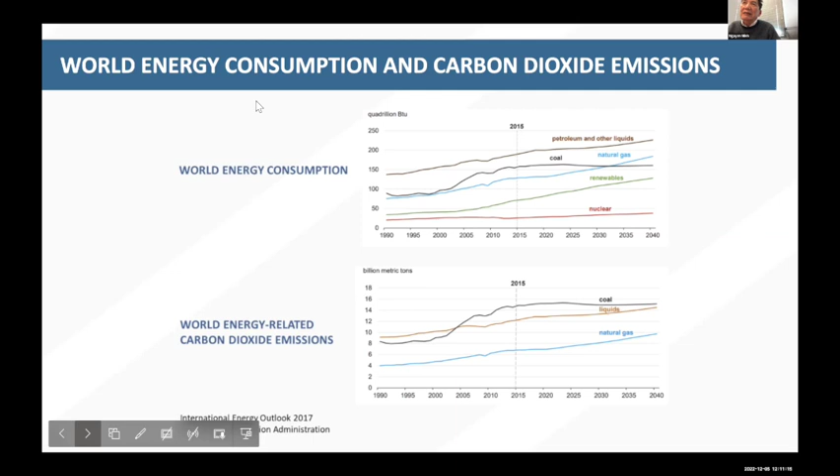According to the U.S. Department of Energy Information Administration, or EIA, world energy consumption is estimated to increase about 28% from 2015 to 2040, with fossil fuels being the largest energy sources, about 3/4 of the energy use worldwide. As the use of fossil fuel increases, EIA predicts world energy-related CO2 emission to increase an average of about 0.6% per year.

So meeting this energy growth while limiting CO2 emission requires better efficiency and improvements in the use of energy sources. In addition to efficiency improvement of current energy technology and use of certain methods such as carbon capture and sequestration, potential approaches include development of clean and more efficient energy systems such as fuel cells, expansion of sustainable energy technologies such as solar and wind, and use of clean fuels such as, for example, hydrogen, especially clean hydrogen produced from water splitting using sustainable energy. So fuel cell and hydrogen technology can play a significant role in the efficiency improvements and emission reduction strategy for the future.

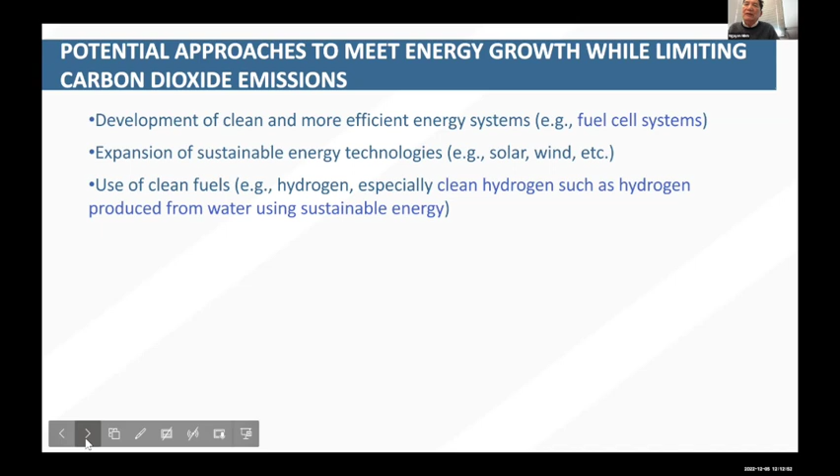Hydrogen and fuel cells are closely associated. Hydrogen is the primary fuel for fuel cells. Fuel cells with hydrogen can be used for clean and efficient generation of electricity. Fuel cells in reverse operating mode, or electrolysis mode, can be used to split water to produce hydrogen. Another feature of fuel cell technology is that certain types can also operate on fossil and renewable fuels.

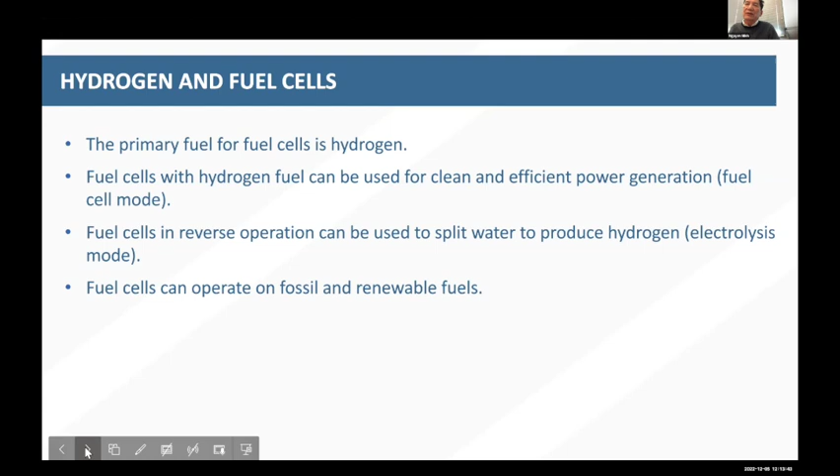Hydrogen and fuel cell technology R&D at UCSD focuses mainly on solid oxide fuel cell and all solid state technology, operating at high temperatures in the range of 600 to 800 degrees C. Our research aims at developing the technology for power generation, referred to as solid oxide fuel cell or SOFC; hydrogen production, referred to as solid oxide electrolysis cells or SOEC; and reversible operation for both hydrogen and electricity production, referred to as reversible solid oxide cell, or RSOC.

The objective of our research is to engineer materials, develop innovative designs and low-cost manufacturing processes, and optimize operation to develop a low-cost, high-performance, and lightweight solid oxide technology for a broad range of applications, including future applications with stringent requirements, such as power systems for electric aircraft.

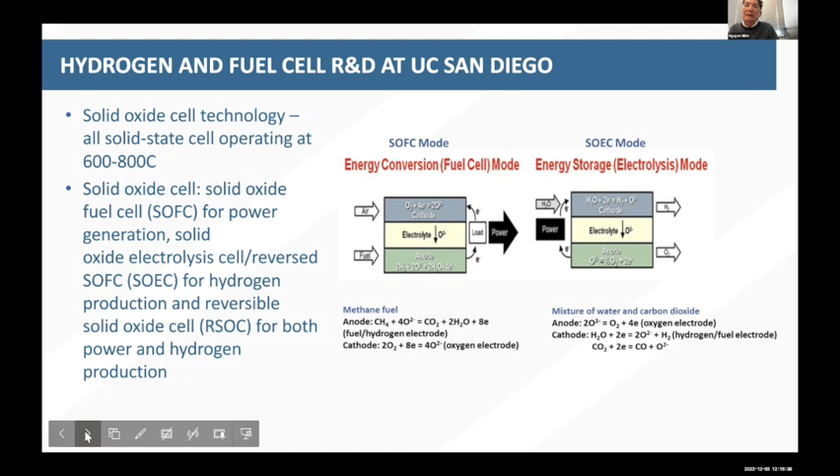So I did mention that the solid oxide technologies can operate at high temperature and can be used for various applications.

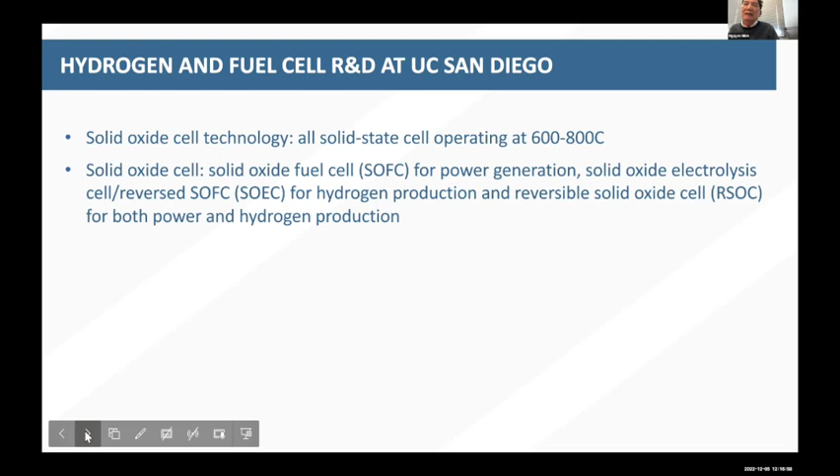Solid oxide technology, in my opinion, could serve as the base technology for future energy systems. I believe that future energy systems should have the characteristic of flexibility, that is fuel flexible, operable on a variety of fuels, and compatibility, that is environmentally compatible.

Other desirable characteristics of future energy systems include capability, that is multifunctional; adaptability, that is suitable for diverse applications and versatile to local energy needs; and lastly, but also importantly, affordability, that is cost competitive and cost effective.

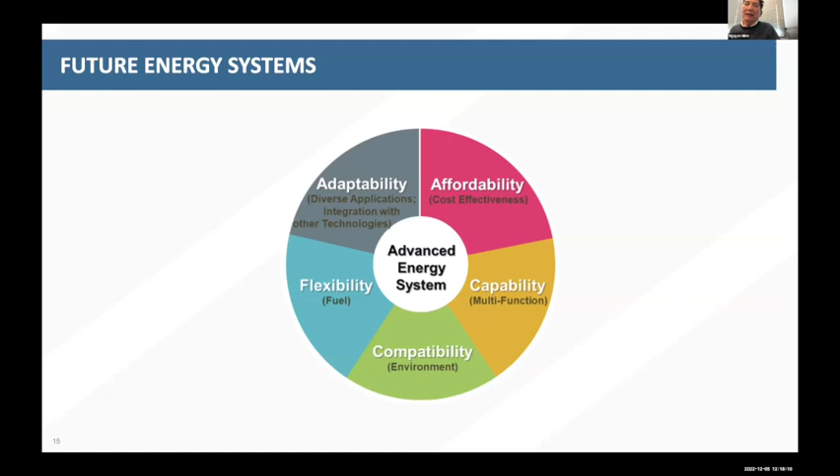The solid oxide cell technology has all those characteristics, so I believe it can serve as a base technology for future energy systems. Its fuel flexibility, capability, and adaptability set the solid oxide cell technology apart from many other energy technologies, and also other types of fuel cells.

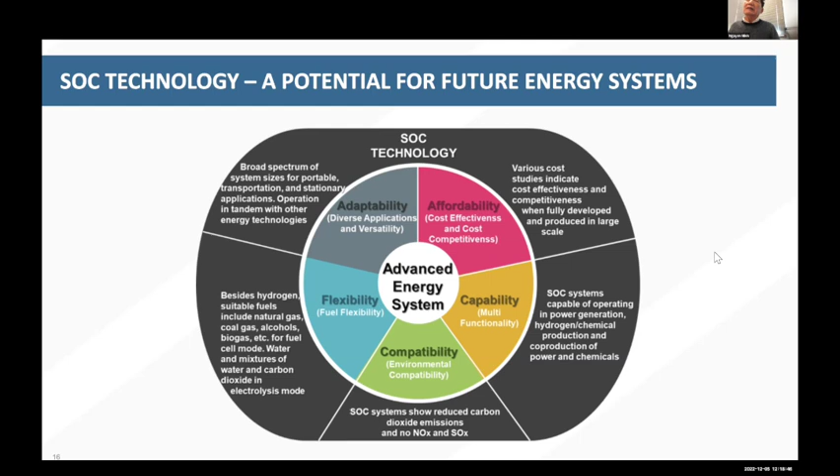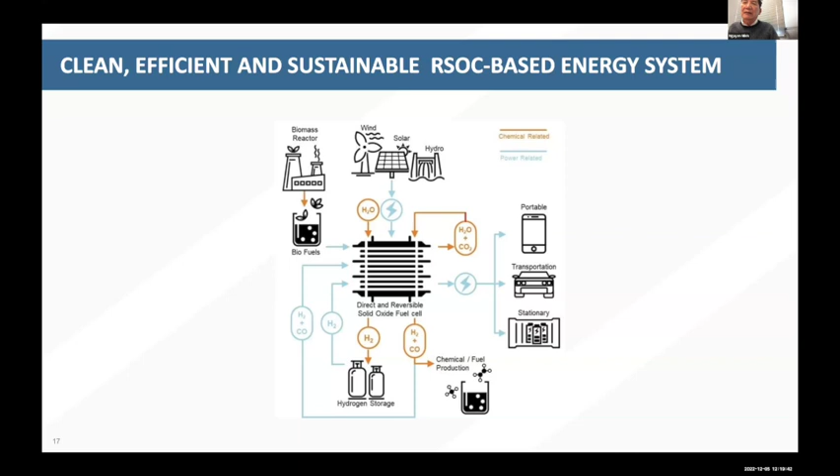In a project at UCSD supported by the Department of Energy, we've been developing reversible solid oxide cell technology for a distributed energy system that can produce about 750 kilograms of hydrogen per day, and also about 600 kilowatts of electricity. This system can be used for on-site hydrogen generation for hydrogen filling stations, and can also provide power for small communities.

Before I start, I can't refrain from showing you this.

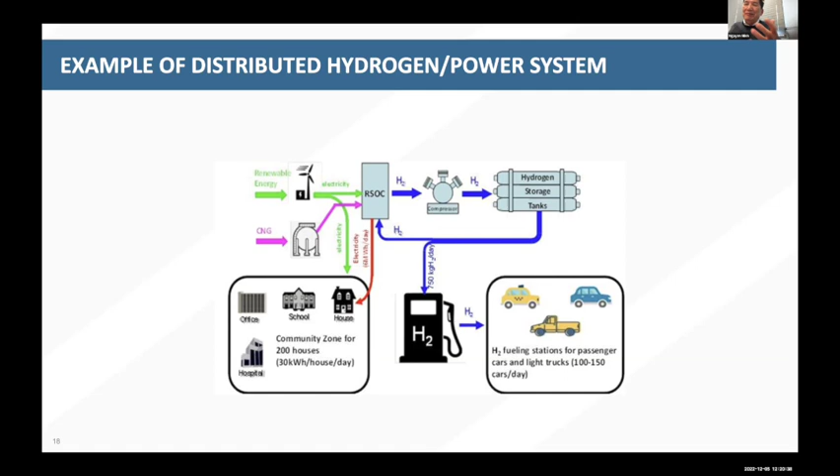The solid oxide cell technology that has been developed for hydrogen production has found an application in space exploration. NASA has selected solid oxide electrolysis cell technology for its Mars mission to generate oxygen on Mars using the Mars CO2 — Mars atmosphere contains about 96% CO2. The technology was successfully demonstrated for oxygen generation in the Mars mission on the Mars rover in April 2021.

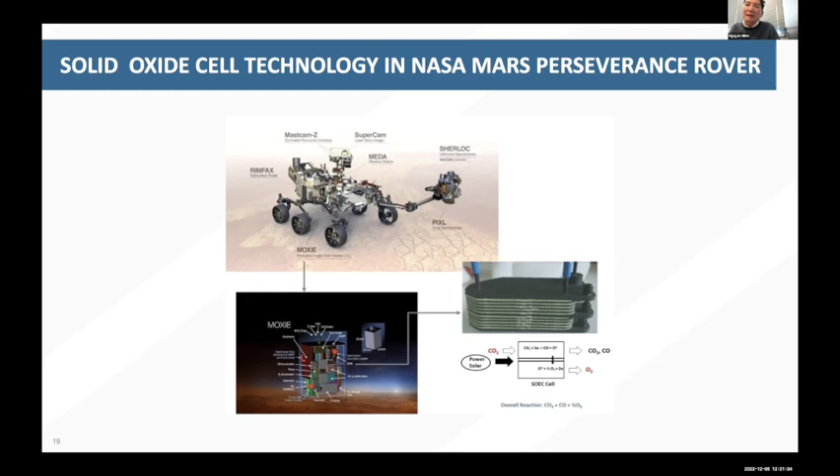In summary, clean, efficient, and versatile hydrogen and fuel cell technology, I believe, can play a significant role in energy systems for the future. You may wonder, these technologies are so good, why not widespread use? Well, the technology still needs significant improvement in a number of technology areas, and also in the area of cost, before it can be used for widespread application and adoption. That concludes my part of the discussion. Thank you very much for your attention.

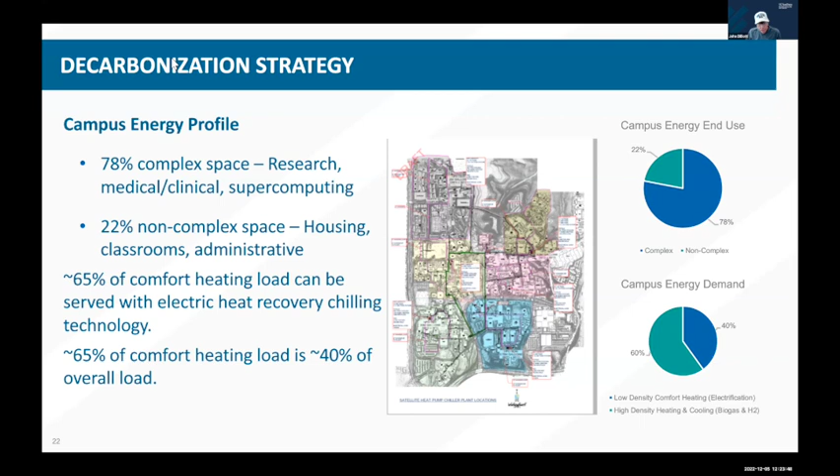It really gets down to the research component of the campus and how much that drives our energy use. As Jen said, our combined cycle heat and power plant, cogeneration plant, was really installed to generate steam more efficiently. The electricity portion is really the side benefit of it. Our campus infrastructure is almost a victim of our own success.

A little different from other campuses that you might hear about, like Berkeley and Davis. They're going through some pretty large renovations of their heating system. They have a steam system, a very inefficient way of heating, whereas our campus has this high temperature water system installed in the 60s, and it's still providing heat to these research buildings.

And the research load really drives us. 78% of our total load is really this high energy density heating load that the laboratory buildings and clinical buildings provide. Really, the success of the campus.

We looked at, if our load was just comfort heating, I think this would be a fairly easy problem to decarbonize, but 65% of our comfort heating load is really only 40% of our total load. We looked and studied comfort heating reductions through the use of heat pumps. All of our new buildings are being designed to use this strategy as much as possible, but it still leaves a fairly large gap of how to provide that high density heating.

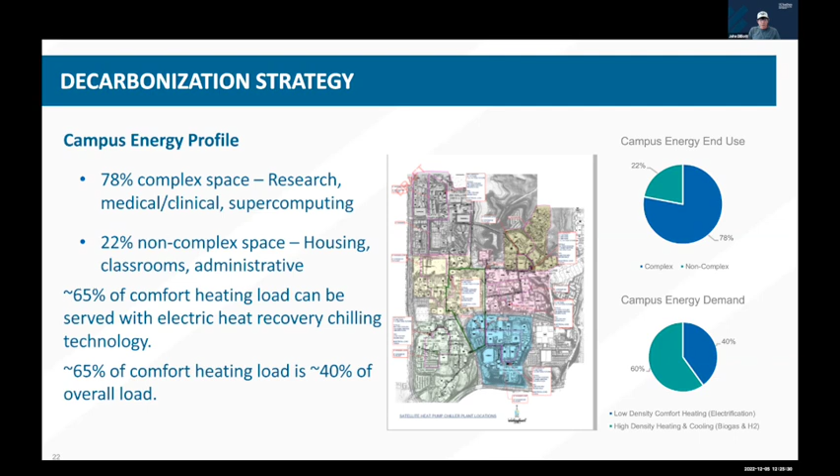You can go to the next slide, please. I won't take very long here, when we get to the other presentations they're very informative as well. So the hydrogen section is a way we see to decarbonize our natural gas use, along with a UCOP program of biogas. So we can get 20% secured in biogas now.

We see potentially 40% by 2025. Add hydrogen to that, and that's 60% of our emissions going down. So we see this as a very viable way of reducing greenhouse gas emissions.

And I wanted to highlight a couple of the other areas we're working on. Solar thermal, we see as a very viable way of reducing natural gas use on campus. In the Center for Energy Research, Dr. Coimbra's research area is in solar thermal. We're partnering with them to look at campus-wide integration and rollout of solar thermal.

We're going to be studying that. And also in the energy geotechnics section, Dr. Ingrid Tomac, we're working with her on what we call deep geothermal possibilities to create that heat. So I think we want to embrace the living laboratory outreach and highlight our own campus researchers, and continue to develop that, and look forward to partnering with all campus entities that can help out in this.

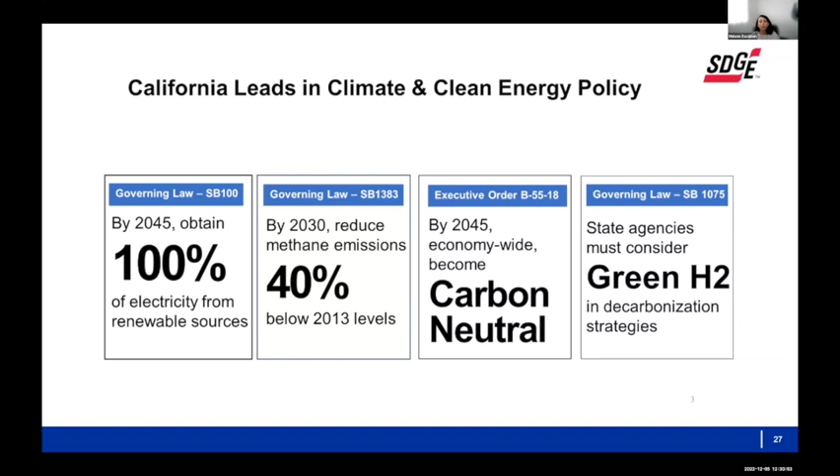Recently, federal laws have also promoted and supported hydrogen. In 2021, the bipartisan infrastructure law authorized $9.5 billion in funding for hydrogen infrastructure projects — a tremendous increase in funding. It also did something really important, which was define clean hydrogen, allowing every state in the nation to use common terminology when we talk about clean hydrogen.

A lot of people are concerned that hydrogen is just an excuse for more fossil fuel. What this definition for clean hydrogen does is define hydrogen in terms of the amount of carbon dioxide emitted when the hydrogen is produced, and it caps it. This enables us to begin to have common ground in which we can talk about hydrogen, because you might have heard terms like green hydrogen, gray hydrogen, and brown hydrogen — and the colors weren't really serving the industry. So we're glad to see that federal leadership there.

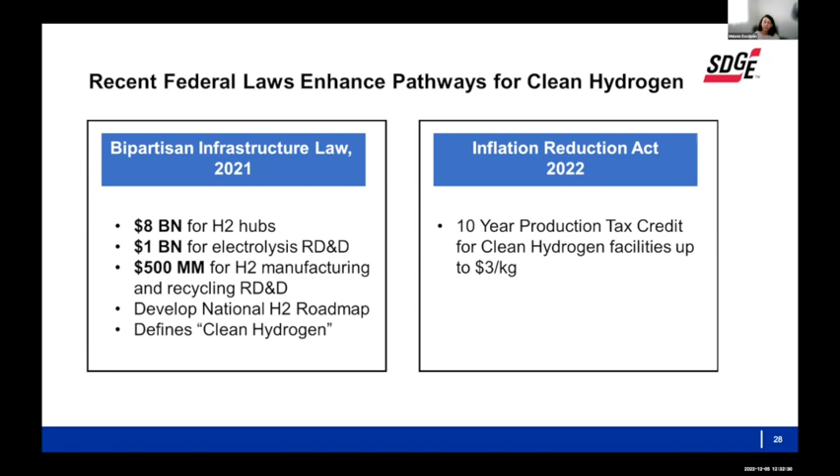Then in the Inflation Reduction Act passed this summer, a lot of tax credits were announced for clean energy production, including a 10-year production tax credit for clean hydrogen facilities up to $3 per kilogram. So if you are making clean hydrogen from electrolyzers powered by clean energy, the federal government will pay the first $3 for every kilogram of hydrogen you produce. A kilogram of hydrogen has as much energy as 1 gallon of gasoline.

So in order to think about how we're going to get to 2045 with clean energy, San Diego Gas and Electric put forward a study that looked at what it will take to deliver these renewables reliably. What's tough about renewables is that they're intermittent and variable.

A day could be less sunny or less windy, so we might not get the electricity we need, especially in a time of very high demand, such as the heat dome we experienced this summer. So reliability is super important, and when we think about reliability, the way we store renewable energy becomes really important. Hydrogen can be a way to store clean energy.

So what we found in our Path to Net Zero by 2045 study — how are we going to get this reliable, clean energy future with 4 times as much electricity delivered as we have today? We found that it's really going to be a combination.

So if you could hit the slide again, I think the illustration will come up. Great, thank you. It's going to be a combination of clean electricity, clean fuels, and carbon removal.

And hydrogen shows up in a significant way, with about 20 gigawatts of hydrogen electricity generation in the state to support the reliability requirement, because as SDG&E, our job is to give electricity to the grid at all times and meet demands.

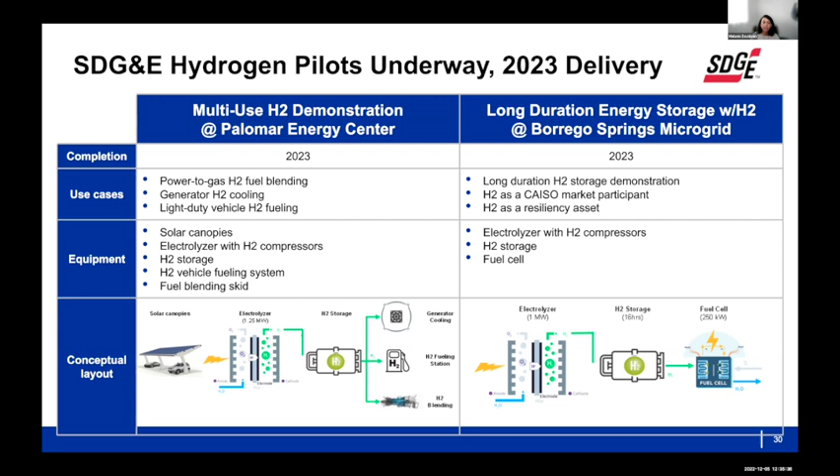So we're deploying a long duration hydrogen battery, if you will. We're going to be making hydrogen on site, storing it on site, and then when the project needs to be dispatched to support the local grid, the hydrogen will go through a fuel cell. It's a PEM fuel cell, so it can respond variably, and support the grid using clean energy and clean hydrogen without any emissions.

Next slide. So when we think about hydrogen on the gas system, there's something I'd like to point out: as you can see in this image, the gas system feeds residences and commercial businesses. It feeds industry. There are certain industrial processes that really require high heat applications, like making glass, making steel, making cement. Those are going to be really tough to electrify.

The other thing the gas system supports is electricity production. Today in California, the gas network is the backbone of the electricity network. Decoupling those is going to take a long time, and they might not ever be fully decoupled. We really need to look at decarbonizing the gas system to support decarbonizing the electric system. Everything's interconnected, and in this transition period, we need to look at all options on the table.

As I said, hydrogen is a tool in the toolkit. We are a regulated utility, and our regulator is the California Public Utilities Commission. The CPUC has asked us to look at the impact of hydrogen blending on the gas system: how much can we blend, is it going to be safe, is it going to impact materials we have on the system, and how is our company going to train workers to safely operate this fuel. So we are putting together a study to investigate the impact of hydrogen blended gas on the natural gas system. Next slide.

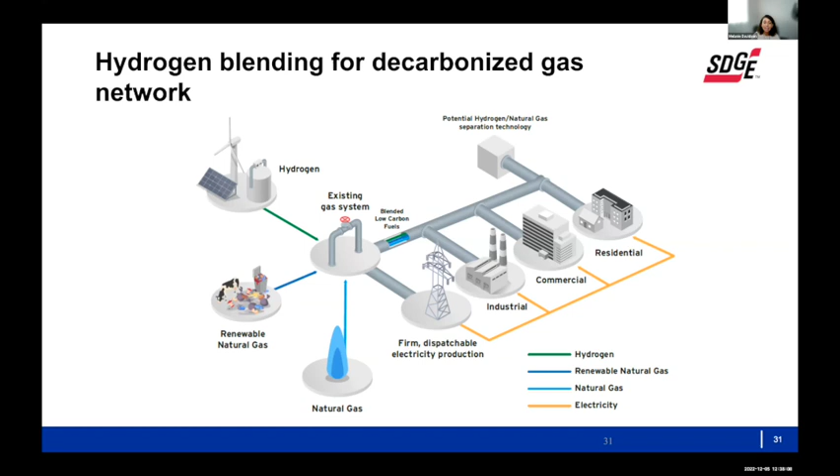We're really excited to be working with UC San Diego. It's our luck that we have a world-class research university in our backyard, in our service territory, that is a living clean energy laboratory. It's great to have heard from Professor Min, and we're partnering with the Center for Energy Research on this pilot.

What we're hoping to learn from our hydrogen blending pilot at UCSD is whether hydrogen can support carbon neutrality in the gas system. We're hoping to tell our regulator, the CPUC, that this is going to be a safe way to blend hydrogen onto the gas network.

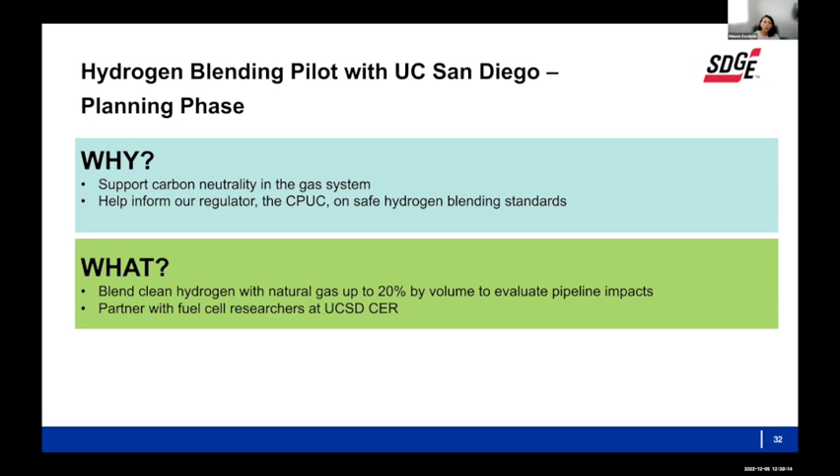What we're going to be doing is blending clean hydrogen with natural gas up to 20% — 20% hydrogen by volume, 80% natural gas by volume — and looking at the pipeline impacts. We chose 20% because that's in line with the vast majority of literature, as well as practical application in other gas jurisdictions of what's considered safe and will have minimal impact to appliances on the other side.

We'll be working with fuel cell researchers — that blended gas will go into a fuel cell. We're working on finding a new campus location, and the project would likely kick off no sooner than 2024. Thank you so much for letting me share some comments on hydrogen and what SDG&E is working on, and I will kick it back to our moderator.

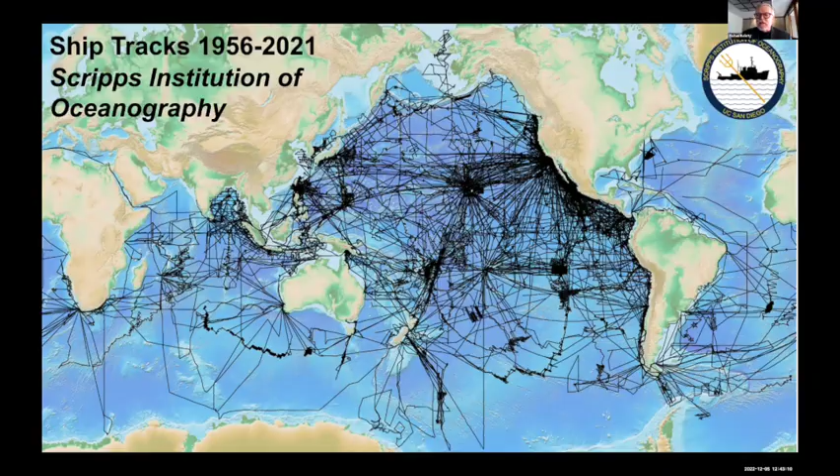Certainly here at Scripps, we have possibly one of the most important scientific works of the 20th century: the Keeling curve, which measures a time series of atmospheric CO2 concentrations measured in Hawaii. It indicates that atmospheric CO2 is increasing, driven by the release of CO2 from fossil fuels. If you consider that the Earth is 4.5 billion years old, you can see from this graph that a quarter of the atmospheric CO2 has been released in just the last 60 years.

Worldwide traffic from ships at sea increased by 300% between 1992 and 2012, and it's still going up. So we need deep, deep cuts in greenhouse gas emissions to impact global climate change problems, and simply making small reductions in fossil fuel use won't solve the problem. We need zero emission technology to become stable against the growth of maritime at sea.

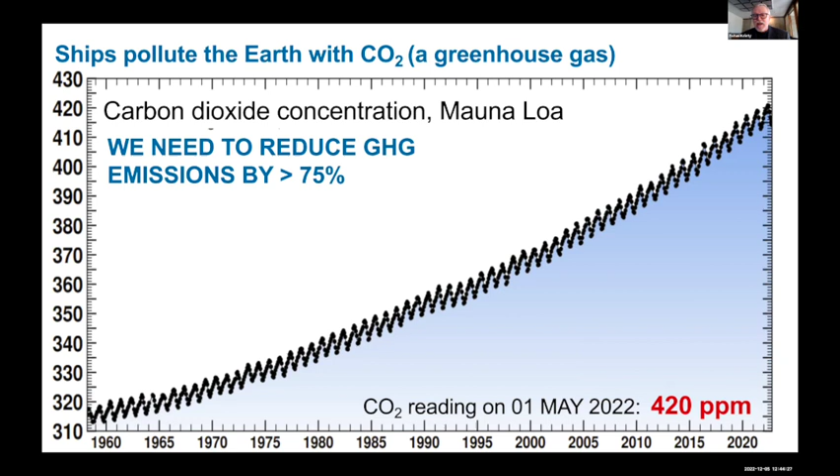How are we doing as a fleet of ships? We have an organization called UNOLS, the University-National Oceanographic Laboratory System. Every university that operates oceanographic vessels is represented here. In the last 62 years, the academic research fleet built 57 vessels, and every single one of them burned fossil fuels. We're approaching 500 million gallons of diesel fuel consumed in these last 62 years. That's almost 5 million tons of CO2 released into the environment. Scripps alone contributes 18,000 tons of CO2 per year into the environment.

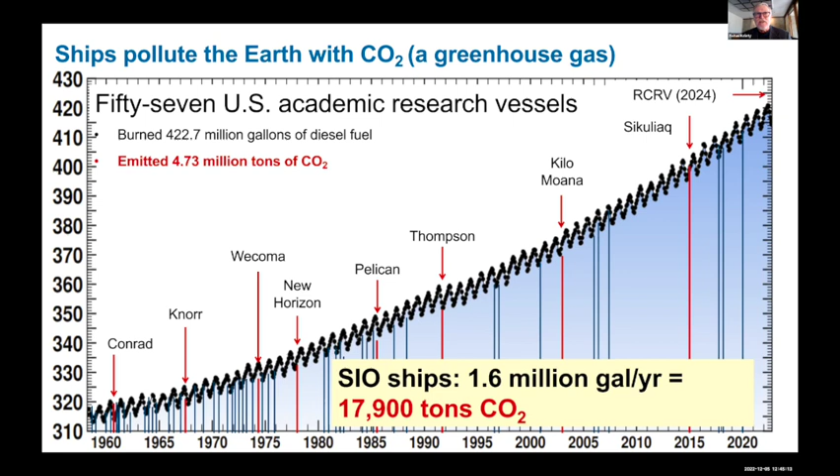There is an adage to think globally, but act locally. So for this study, we're going to take a look real quickly, considering that the effects locally can be extended to thinking about global effects.

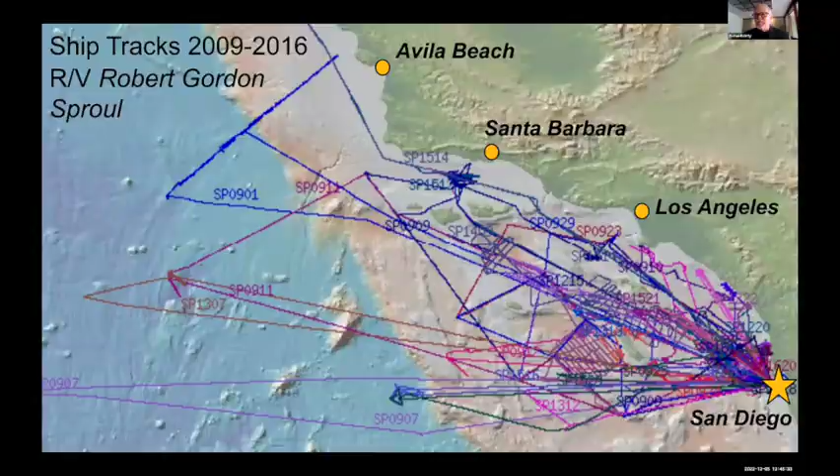This is very serious because the Los Angeles basin is home to 19 million people, which is more than the population of all but 5 states in the union. Nitrogen oxide, sulfur oxide, and particulate matter are considered criteria pollutants by the California Air Resources Board based on their toxicity and relationship to lung cancer and other diseases. So diesel exhaust from our ships causes a substantial risk to public health.

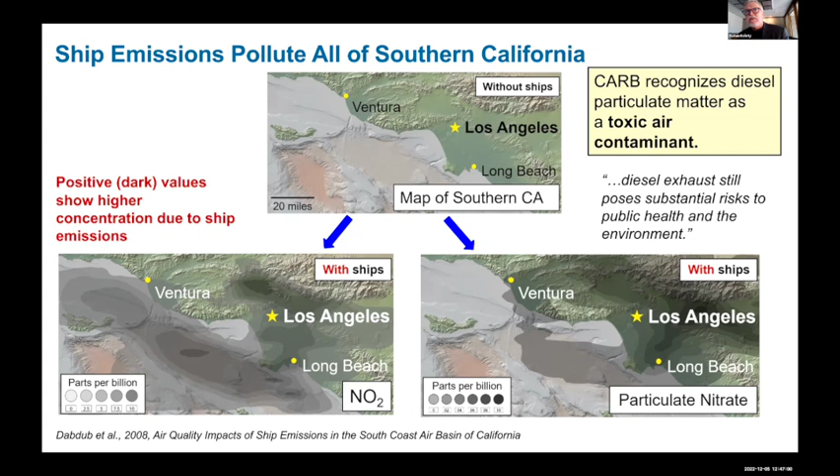We've also made some strides forward. We've already had hydrogen fuel cell use at the facility to reduce the amount of electricity we draw on our ships. And we know already that there are scientific advantages for using hydrogen power at sea. It's very, very quiet, so you don't put any noise into sensitive acoustic environments. Zero emission operations will allow sampling of uncontaminated air and water, and you'll have minimal impacts on the physical and biological systems that we study. A nice byproduct of the use of a fuel cell is you get ultra pure water, and water is always of great value at sea to anybody.

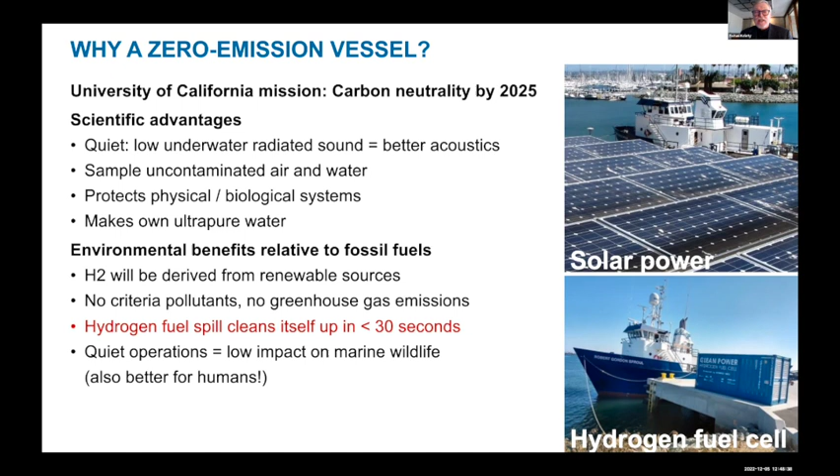So again, hydrogen can be produced, as we've heard, from renewable sources. No criteria pollutants come from the use of hydrogen at sea. And fortunately, our collaboration partners assisted us in a study of the feasibility of using hydrogen at sea as a maritime fuel.

My boss, Dr. Bruce Appelgate, was able to get $1 million from the US Department of Transportation, and so we performed a study: could we, using technology today, make a research vessel that actually had zero emissions? In 2018, we participated in a study, and the answer is yes. You can build a ship today, a research vessel highly capable that can produce zero emissions.

This is a tremendously capable ship, and it would be a real inspiration to our students who went to sea to say, man, I'm going to sea, but we are not polluting the environment while we're doing it. As we can see, no fossil fuels. When you spill hydrogen, you don't pollute the environment because it evaporates and goes to the atmosphere very quickly.

The downside of this ship was this particular ship had a capital cost of $82 million, and the fact that it would need to be 170 feet long, whereas Sproul is 125 feet long. It was a bit more of a ship than we wanted to chew off and bite in one.

We really wanted the ship, but we couldn't afford the cost, so we went back to the Maritime Administration.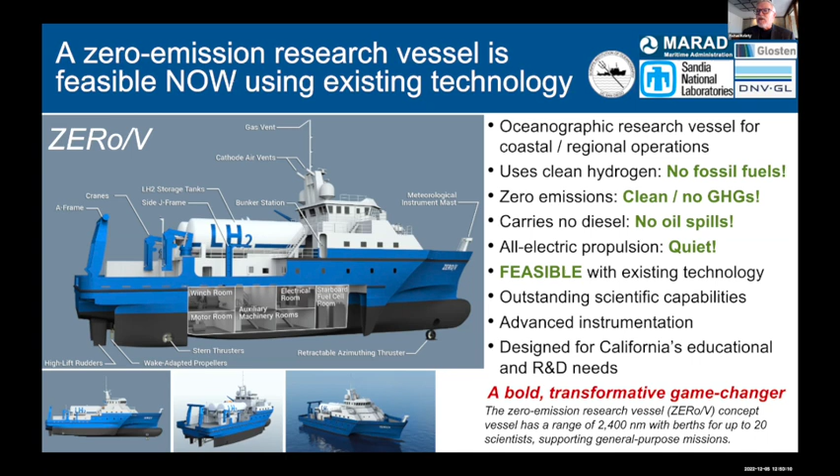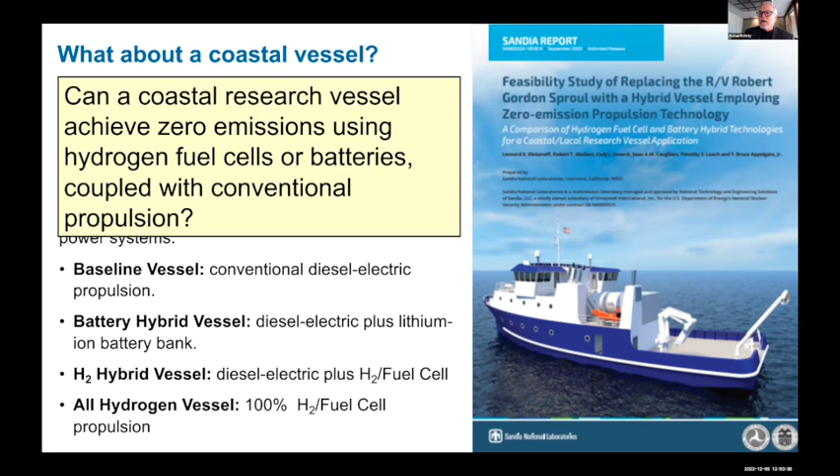We said we would like to study a smaller hydrogen-powered ship, using the form and function of Sproul, the ship to be replaced. We performed this study just two years ago, and we found out, yep, indeed, you could do it.

Here's the task we had: the tracks that Sproul actually operates under. We would like to have at least 10 days at 10 knots, so we need a range of 2,400 nautical miles.

Dynamic positioning is the ability of a ship to hold itself in place in one spot at sea. This is a tremendous capability which Sproul doesn't have, so we're moving up in capability.

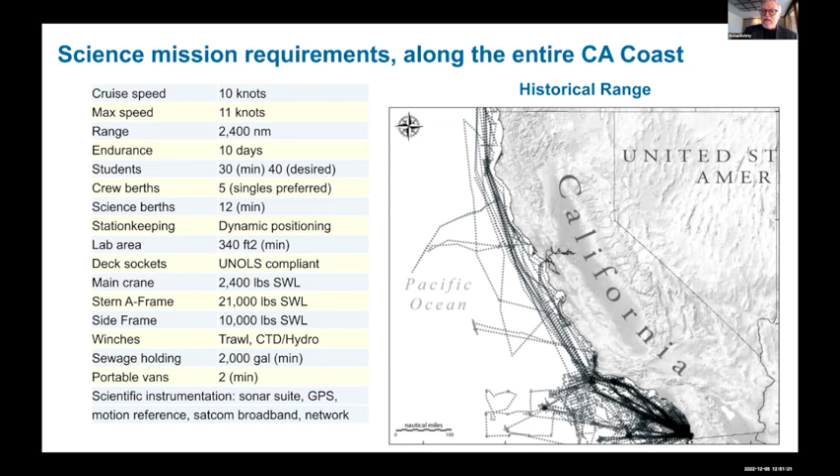We'd like to be able to make day trips with 30 students, sometimes up to 40. Our California research vessel needs to concentrate on California coastal oceanography. We would like to have a nice array of scientific instrumentation, and we've already proposed a ship of this level.

So what's the key outcome of our studies? We found out that for a Sproul-size ship, unfortunately, she cannot make it 100% on hydrogen. That was an outgrowth of this study.

We also studied a combination of diesel fuel with batteries, and diesel fuel with hydrogen. You'll see that a ship on hydrogen can go 9 times as far as a ship on batteries. So our immediate conclusion was a hybrid between diesel and hydrogen is the way to go.

But our range of 330 nautical miles allows us to do 75% of Sproul's current missions exclusively on hydrogen. So 3 out of 4 times that our ship is underway, she'll be underway on zero emissions.

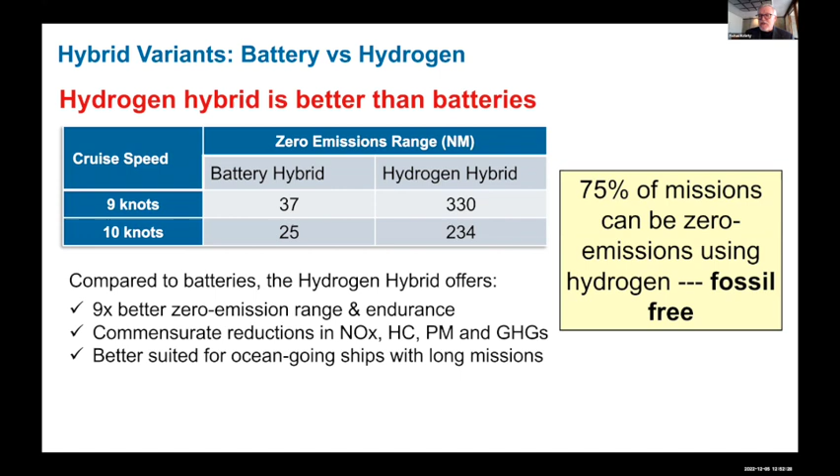Here's a simple diagram of our approach to maritime power. We need about 900 kilowatts for propulsion. We get 1,000 kilowatts of installed power from 5 200-kilowatt fuel cells, and we also get 1,140 kilowatts from 3 diesel generators.

The diesels need not run at the same time as the fuel cells. You either run one or the other. We need the diesel to get to the 2,400 nautical mile range, but you can get 330 nautical miles exclusively on hydrogen.

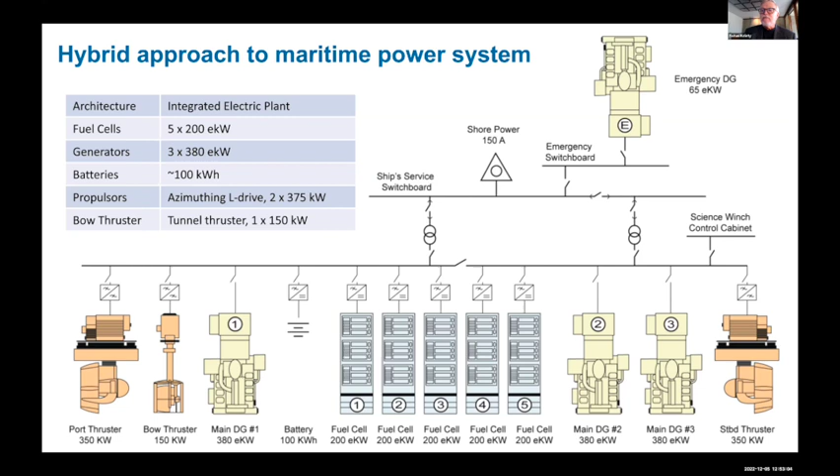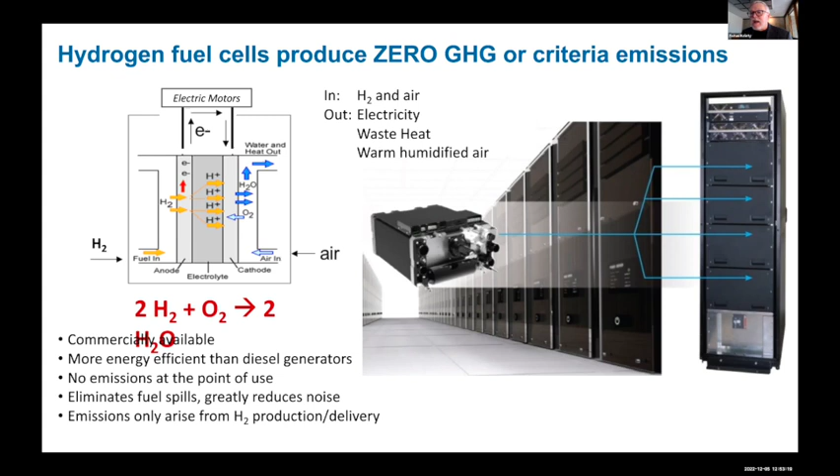We've already seen today some discussions of fuel cells. The great news is you put in hydrogen and oxygen, and you get out a little bit of warm air, a little bit of pure water, and then electricity, which we use to power our ships.

The good news story: if you did go with hydrogen, you get a 99% reduction in criteria pollutants. We're only going to take credit for a 91% reduction in CO2 emissions, because we'd have to use a truck to get hydrogen fuel from the production facility all the way to the ship.

If the truck itself ran on hydrogen, which is a real possibility, then you'd have about 100% reduction in CO2 emissions. So we look forward to this in the future.

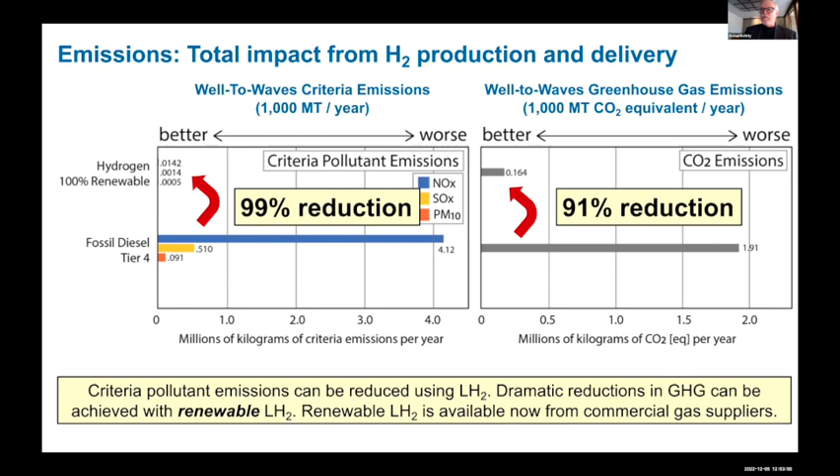Certainly, if NASA could fuel a ship, well, Scripps could fuel a ship. We already know the Artemis mission, which is returning from the moon right now, left the Earth using hydrogen. So we say here at Scripps, if it was easy, we'd let Woods Hole do it. But in the meantime, we anticipate we will be able to bunker our ship successfully with liquid hydrogen.

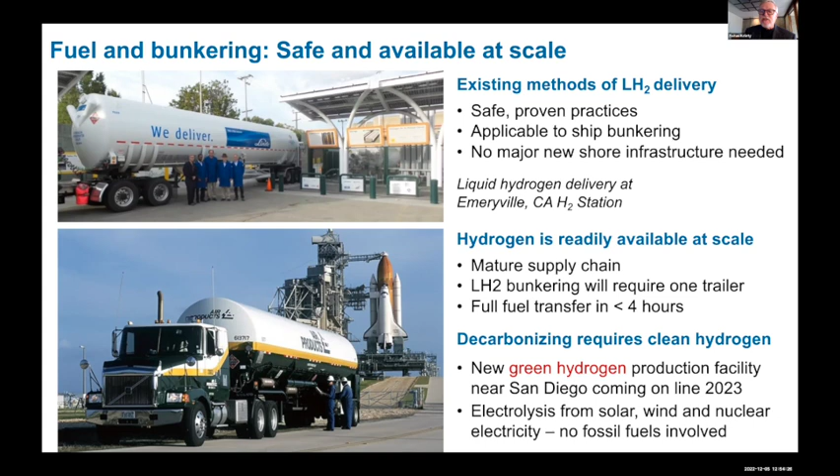The good news story is, in the Budget Act of 2021, $35 million was provided to Scripps Institution of Oceanography to build this forward-leaning hybrid vessel.

We are well underway on our schedule to build. We're 16 months into our project. Our office was established on the 4th of November in 2021, and we've already submitted a request for information. We had industry tell us about what they thought about our ship. We went forward with a request for proposal, and we've already selected a designer, which is the Glosten Corporation.

Hopefully by 2023, next year, we'll be selecting a shipyard to build our ship. In 2024, we're going to start construction. By 2026, we'll complete our ship and have it accepted by the U.S. academic fleet, and by 2027 be in operation. I thank you for your attention today.